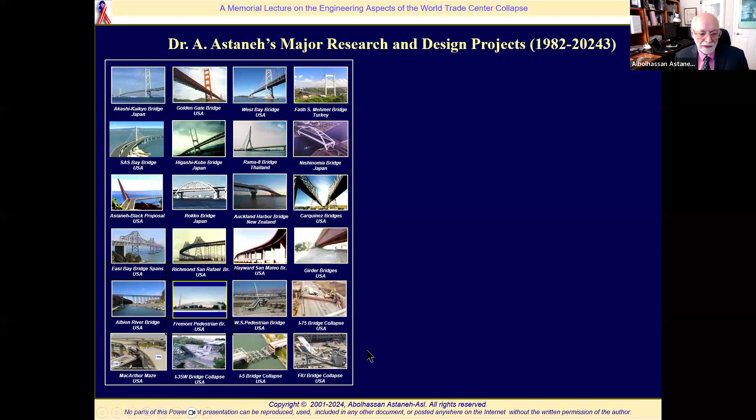I have this slide in all my ethics presentations. I've been involved, as Donald mentioned, in bridges and buildings. These are my bridge projects on the left. Down here is the expert witnessing I've done and failure analysis in court for collapsed bridges. These are the building projects I had, and of course I've been involved in a lot of research at UC Berkeley, at the Earthquake Engineering Research Center, and so forth.

These studies and this webinar are dedicated to the memories of all victims of the 9/11 terrorist attack, and to the firefighters, police officers, and other first responders who so heroically sacrificed their lives to save others.

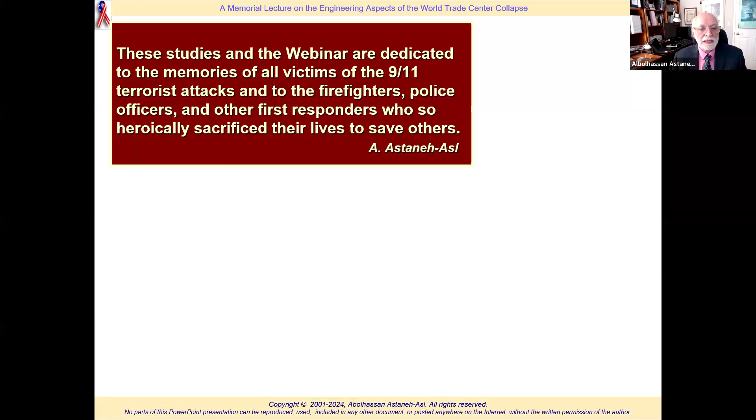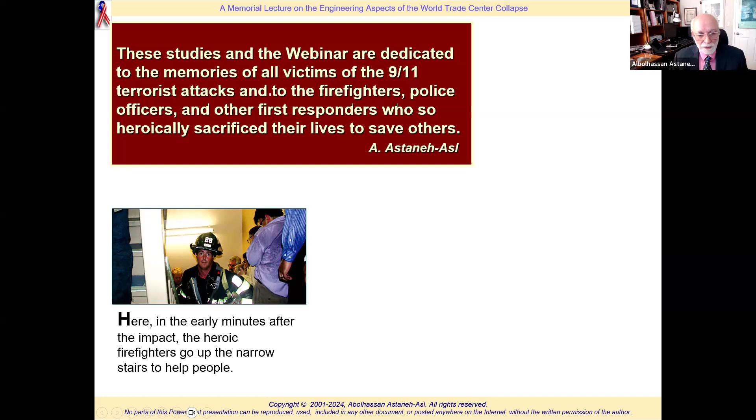Here is the North Tower. You can see people after the airplane hit, and the firefighters going up. They responded very rapidly, and after the South Tower collapsed, they were still in the North Tower helping people evacuate. Unfortunately, with the collapse of both towers, we lost 414 of the most honorable heroes and the best that humanity can offer on that tragic day, when the firefighters themselves also perished in the collapse.

They went into a very vulnerable building - I think this is the highest sacrifice anyone can make. More than 1,500 people who went in, including the firefighters, even a DNA sample was not found.

This is the wall at the World Trade Center memorial at the site now. 2,753 innocent people perished at this site.

In honor of them, and to never forget them, let's have a moment of silence.

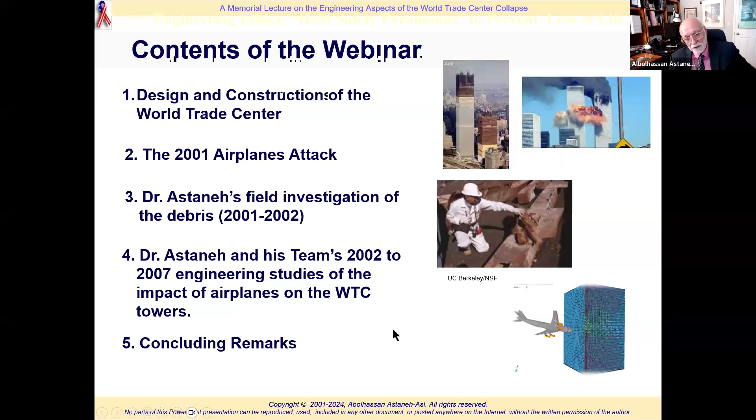The designer, the architect, buildings have architect and structural engineer. Architect usually is well known, kind of like buildings are attached to architect. Architects figure out the appearance of the building, the aesthetic of it, where you should have elevators, where you should have staircases, what the walls should be, the spaces, the bedrooms, the living room, basically the function of the building.

But the structure of the building is what keeps it up. Those columns, vertical columns and horizontal beams, and foundations, are the work of structural engineers. It is always said that if you are a structural engineer, you don't want your name in the newspapers, because when your name is in the newspaper, something really bad happened to your structures. No one appreciates structural engineering. The worst is actually plumbers, they are worse than structural engineers. No one wants to appreciate plumbers' work. It's not glorious perhaps for some people. But they're all professionals. We are all professionals trying to provide public comfort and safety.

So it was so important that it was on the cover of Time magazine at the time. The structure was important, the building was important, and Yamasaki was important.

Then, the structure drawings are signed by Leslie Robertson, who was a graduate of our College of Engineering. But Leslie Robertson at the time was a very young engineer, working for the Skilling firm. Skilling was a structural engineering firm in Seattle, and really the design was the brainchild of John Skilling. He was extremely adventurous, I would say, as a structural engineer, and you will see as I go through this webinar how daring, in a dangerous way, he was.

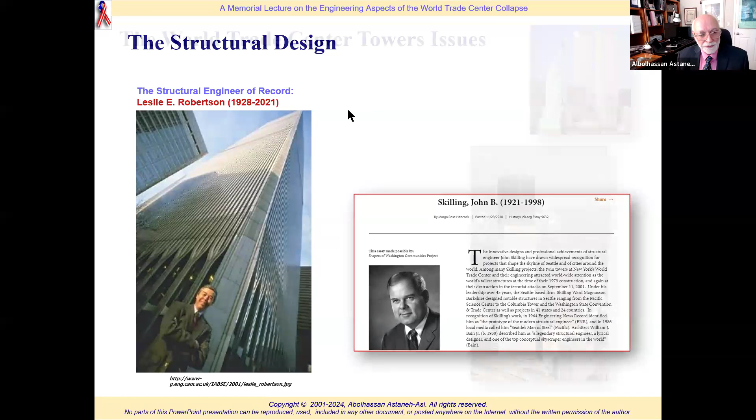So this is the World Trade Center under construction. The World Trade Center towers did not need to obtain a construction permit. You might say, what? Because if you want to remodel your kitchen, you have to go to the city and get a permit. Why? Because you might sell that building tomorrow or rent it, and someone else is going to live in that kitchen. And if it's not according to code, the people, the family, kids, everyone using that kitchen can be in danger. That's why society started this permit process about 100 years ago, starting with a fire in New York. So it's strange that these twin towers did not have a permit.

And they did not need to get a permit. How come? The reason is the Port Authority of New York and New Jersey, which owns the World Trade Center and still owns it, is a quasi-government entity. It was formed between the governments of the state of New Jersey and New York, by an act of Congress, actually. It was exempt from the laws of both states, and also exempt from tax. But it acted like a private developer and was renting the World Trade Center like anyone else, but was not paying tax. It was originally developed for building bridges on rivers in New York, but eventually it ended up starting the World Trade Center.

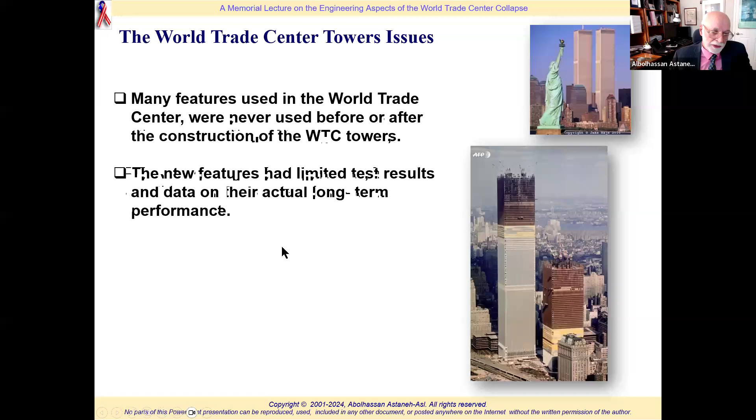The Port Authority, as I said, was the owner in charge of design, testing, construction, inspection, and approval of plans. Now let's look at some of the problems.

The stacked elevators were invented here. In order to increase the area to rent, you can see the core - we call this middle portion the center of the building's core. This is the plan, and it has elevators, restrooms, staircases. I've shown staircases in red and elevators in blue. The red one, we are going to focus on for a few minutes.

The architect, Yamasaki, came up with this notion that until then, elevators were going from the first floor to the roof. Now if it's 110 stories and we want enough elevators to take 20,000 occupants up and down to the roof, it's going to occupy usually 60% of the floor - standard at the time. They didn't like it. They were asked to do something to get more rentable space. I don't want to use the word greed, but the profit motive came in, by corporates, by Port Authority, wanting this building to give more rent money. So he came up with this idea, which you see in many buildings now, which is to stack one third of the building on the other third and the other third.

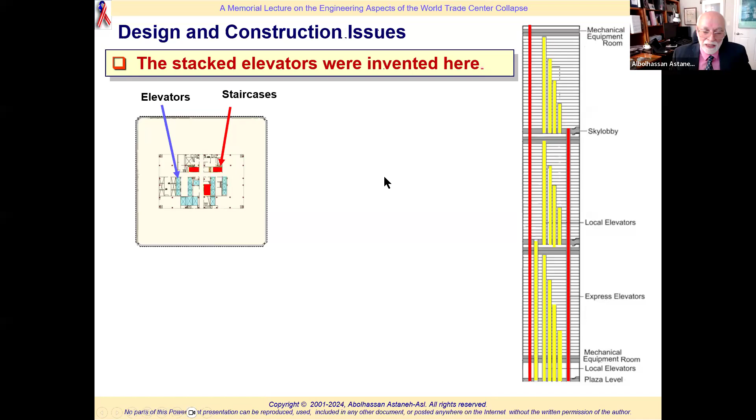This was a very, very important development - it's not a negative development. They ended up having, instead of 60% core and 40% rentable, 40% core and 60% - the donut around it - was rented.

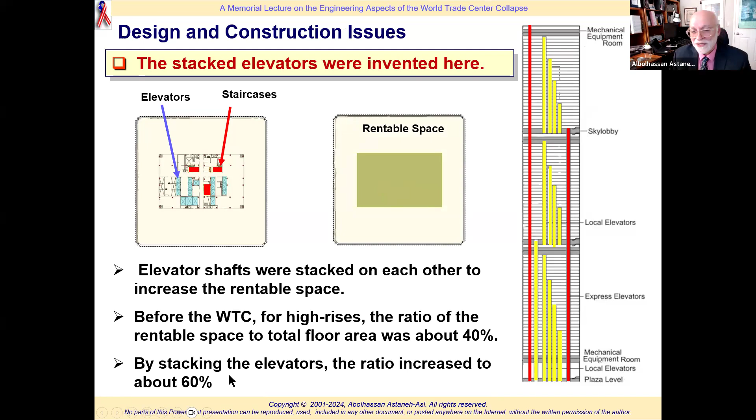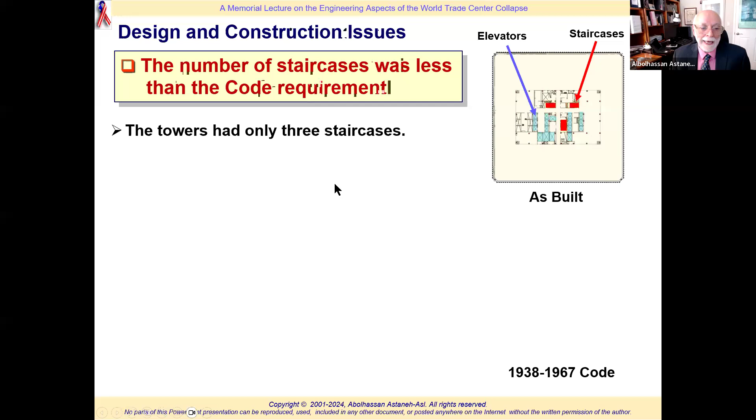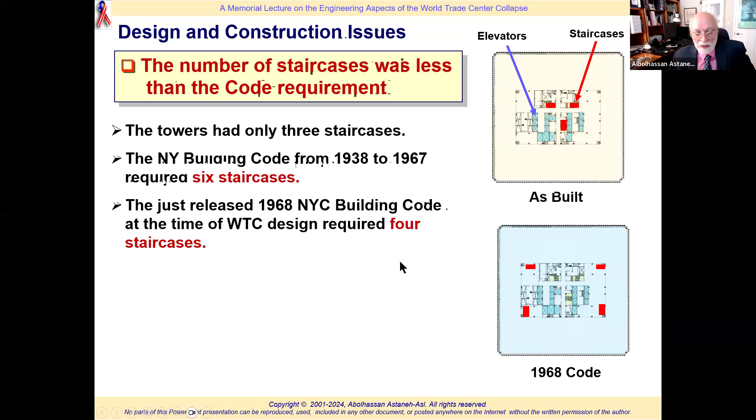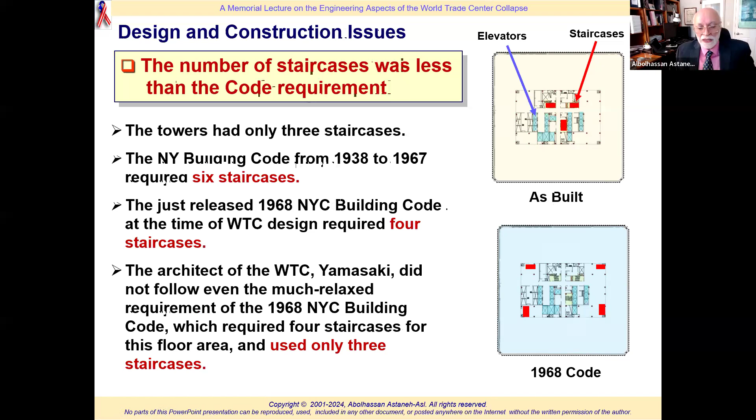The number of staircases was less than code requirement. You can see as-built here, only 3 staircases. This building was being designed in the 1960s, and from 1938 to 1967 the code required 6 staircases, like this picture. I just placed the staircases as I thought would be more rational, for the area - 1 acre area of the building. Then in 1968 it changed, but still required 4 staircases, like this. But they were designing it as they changed the design, and Yamasaki used only 3. This was the first important violation of code - code requires 4, and if you have a 110-story building you might as well do 6, but they went with violation of code and used only 3.

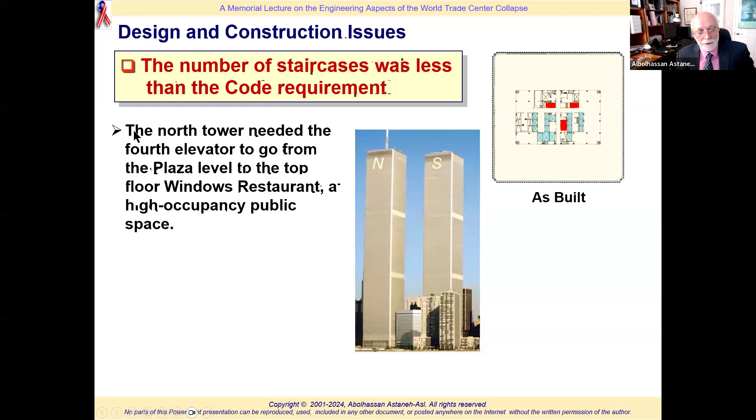So again, the number of staircases was less than the code requirement. The North Tower also needed a 4th elevator, because it had this major Windows on the World restaurant up there - a very large public gathering area. The South Tower also needed a 4th elevator, because it had the observation deck, which continuously had people going from the first floor to the roof, and that should be a separate elevator - it cannot be stopping at stories in between. So all the tourists going up were using these 3 elevators, which is not enough for occupants stopping at all these floors going up.

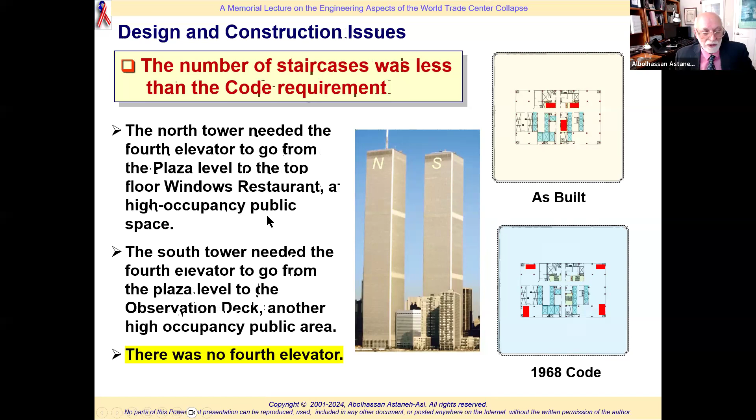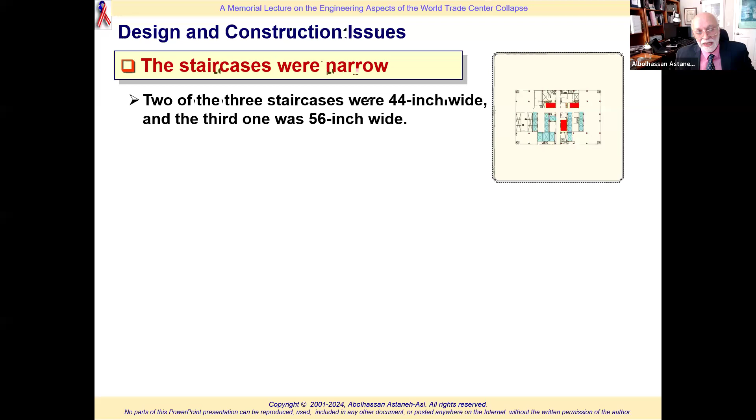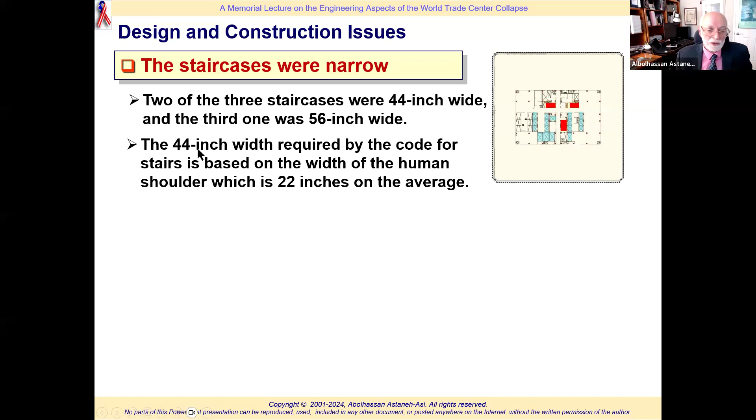The reason you have 44-inch, which was code requirement at the time, is that average shoulder of a person is 22 inches, and they thought one going down, one going up, it will be 44 inches. So they used 44 inches.

But imagine 110 stories, people coming down from up, 20,000 people in an emergency. It's not like nicely going to your meeting and walking at your own pace. 20,000 is the occupancy, and they're coming down at 44 inch. If you open your arms 44 inches, it's not much. It's like two screens next to each other I'm looking at.

So that's what they did, and that's what we saw on the day of that tragic event, how people could not exit. Of course, the people above the impact area could not exit because the staircases were demolished. But the people below the impact area even had a hard time to get out fast.

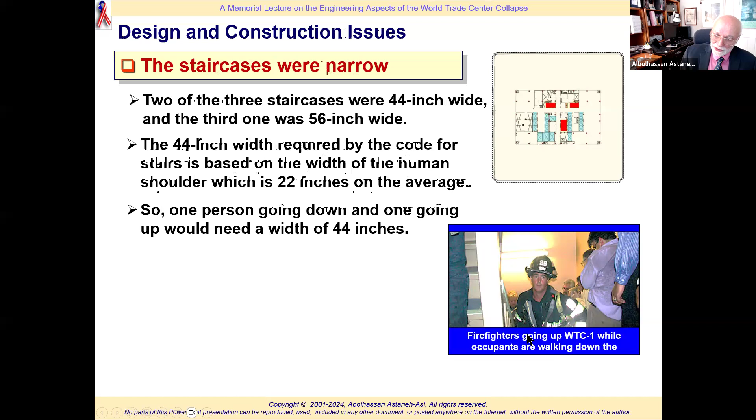So one person going down, as I said, one go up. Now look at this picture, as I showed before. That 44 doesn't fit the firefighters, does it? They have all kinds of gear. By themselves, they might be like 36-inch wide, and they are trying to go up while the other people are going down. So this is another concept.

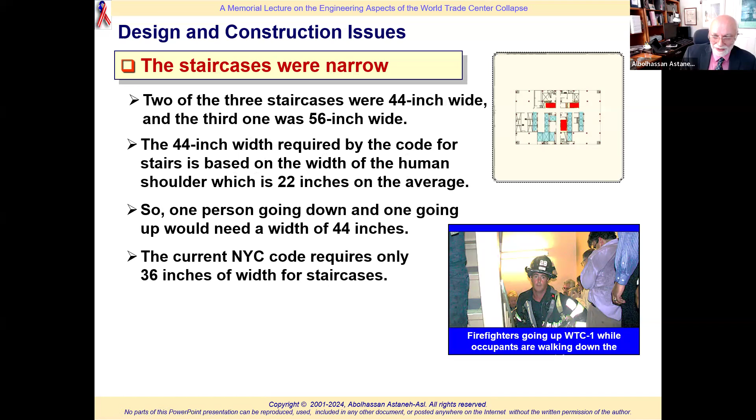The unfortunate thing is this: the current New York City code, I checked yesterday, requires only 36 inches. Have we learned the lesson? Instead of making it like 62 inches, they have made it now 36 inches. I guess the wider staircases, this is my comment, would take away the rentable space, and the developers would not like it. But should the city code consider developers' desire for profit, or safety of the public?

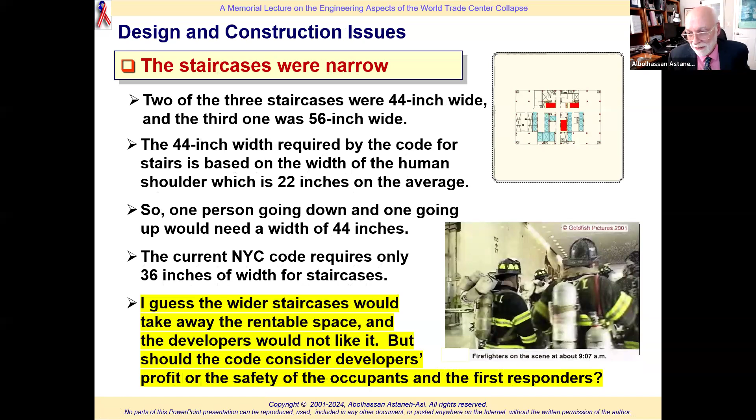And first responders. This is another picture of first responders on 9:07, almost 15 minutes after the first tower was hit, gathering there to go up. With this gear, you can imagine even one person cannot go up with a 44-inch staircase.

Let alone think of the people who had wheelchairs. Of course, when the fire starts, elevators are shut down. So what about them? That's another story, what happened in this tragic event. People were carrying wheelchairs, so difficult.

So all staircases were at the center. Three staircases - I'm not saying code says where you should put it, but it's very well understood in fire engineering that the reason you put these fire exits is so people, wherever they are, can get to one nearby. In this case, you are telling all people around the core that if there's fire, go inside the core and go down from one of these stairs.

What happens is actually the most danger for fire is in the core. You have all the pipes there, you have all the electricity there, you have all the other storage there. The fire does not start here, it starts mostly here, and you're telling them to go there and go down. You'll see what was the consequence of having those 3 stairs at the center.

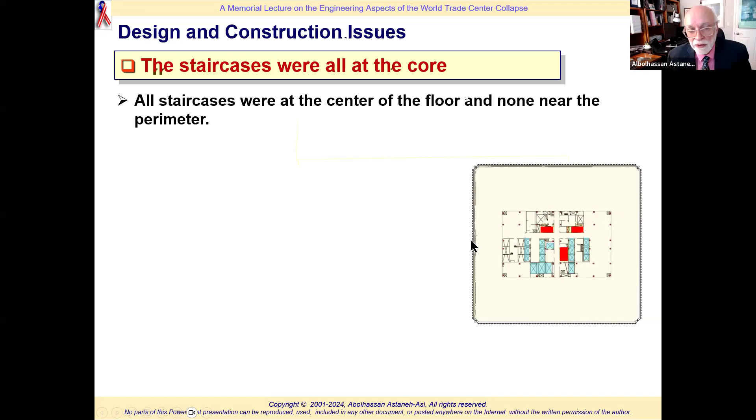So one of the documents included in the NIST report - because later National Institute of Standards and Technology got a grant to study World Trade Center properly - they reported that they got a document from Port Authority that showed Port Authority was eager to cut down on the amount of space devoted to stairs. How tragic that can be - that they're thinking, can we cut 2 inches from the stairs so we can rent that 2 inches?

One acre is the floor. In the impact area of the North Tower, I'm usually showing the North Tower plan - the other one was very similar. The staircases were 70 feet apart and were destroyed immediately when the plane hit.

I'll show you, when the plane came from the north, it destroyed all 3 staircases, and more than 1,500 people were trapped, and they, of course, perished in the fire or the collapse.

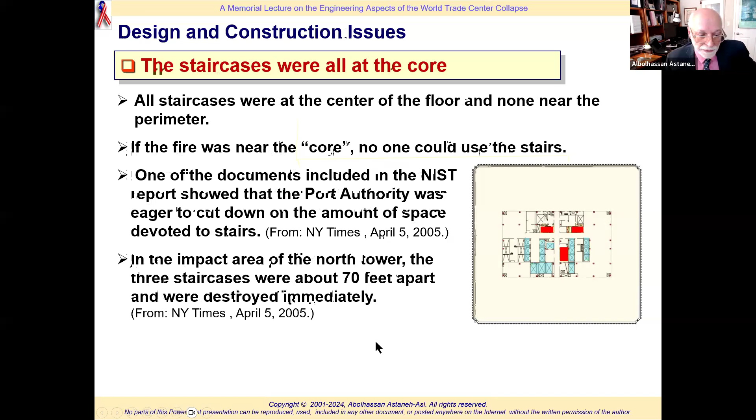In the South Tower, the plane hit on floors where the 3 stairs were about 200 feet apart - they were a little bit farther apart. And I met one person who had escaped from that damaged floor. He was a young person and had retired from work, and I met him in LA when I was doing a presentation.

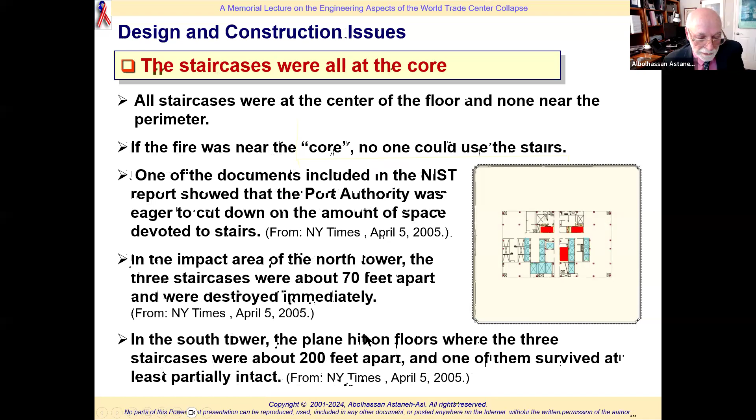I'm not clear, I couldn't find if the partitions were fireproof. They required curtains to be fireproof and furniture, but I don't know if partitions were fire rated. That's why the whole floor was like a burning charcoal pit. So it was without firewalls.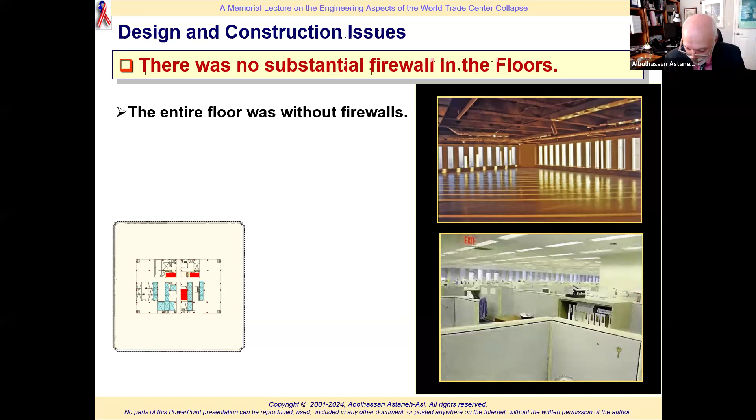This is very important. There are certain code requirements, fire code, that you have to compartmentalize your floor, especially these large floors. So if fire happens in one corner, the other parts of the building don't get affected, even the smoke doesn't go there. They're all fire doors. But in this case, of course, there were no fire walls.

At least, if they were planning to keep the configuration, they could divide it into 4 and have each one have its own staircase, so everyone can have their own staircase and their own space. So if one gets on fire, the other 3 are able to escape.

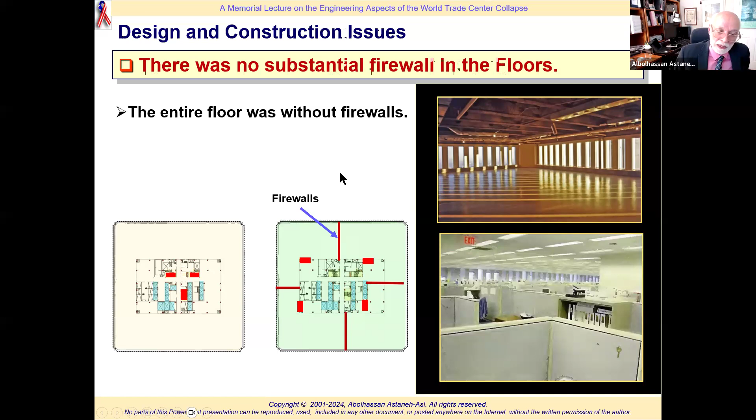Staircase walls were drywall. This is unbelievable. If you look at your building, an office building, even 4 or 5 stories, it is either concrete blocks, or for tall buildings, just reinforced concrete wall. This is the only building I got to know where it was drywall, just gypsum board. You can see the staircase.

So what is the impact of it? When the plane hit the building, the staircase, of course, was nothing, like cardboard. And the plane went in and hit the large columns and exploded and spread the jet fuel gas, and started the fire. This is not allowed in any code, anywhere in the world.

I can't imagine any even half-civilized country or city would allow gypsum boards to protect people in staircases that are fire exits. In fact, the staircases should be pressurized to always keep the smoke out. The doors of staircases should all have very strong steel spring hinges. This was not the case, they could do whatever they wanted, and they did, to save money.

In fact, in 1993, there was an attack with a car bomb, there was smoke in the elevators, and one elevator had 4 people trapped in it at mid-height. These 4 people, using the keys for the car, were able to poke into the wall and say, oh, this is gypsum. So they kicked it and they came out.

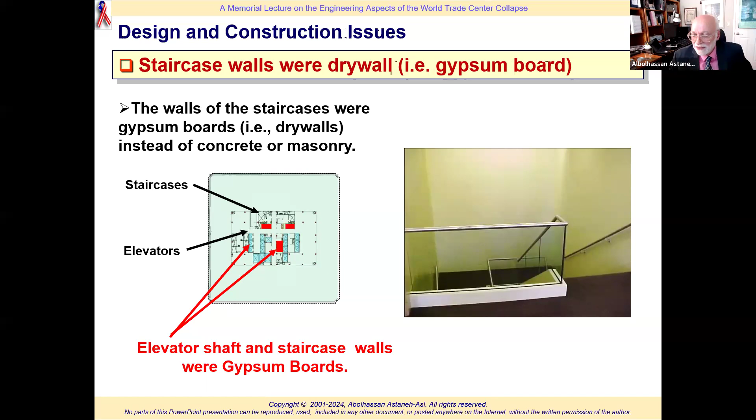This story was in the New York Times, and it was very exciting because everyone said, oh wonderful, they saved themselves from smoke because the elevator shaft becomes a smokestack. But no one, including the Port Authority of New York and New Jersey, or even the engineering community, asked: what, someone could kick the elevator and staircase wall and come out? What was that wall, concrete? And then, of course, they had to correct it, but nothing happened.

Staircases were not going straight down. This is an amazing thing. In order to have these big, probably conference rooms or meeting rooms, look what happens if you're coming down from the top. You come down and get out on this floor. What is this floor? This floor is some corporate floor.

So you're coming down, you go straight down, and after 10 or 12 stories, you have to find your way to this exit, come down a couple of stories, go back, come down, turn around, go here, come down, find this, come down, go back. Imagine, fire is behind you, smoke is killing you, and you're trying to find your way, and probably electricity is even gone, and you're in these floors you've never been to, trying to find this path. It is worse than a trap, it's like designed to make sure you get lost and don't find your way out.

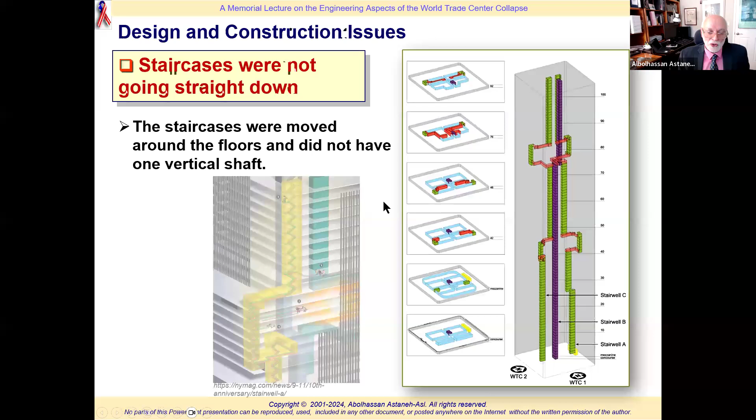So these are the movements of the staircase in the floor, and this one shows it very close. Imagine you're coming down, you have to go there, come down, come back, go up, go to the right, turn left, turn right.

Imagine in the panic, especially if you have health issues, many of us have breathing issues, you are not athletic, all of us are not like 20-year-old Olympic athletes. You are not going to be able to go down easily. This exit should be designed for people, not even average people, but people who need help. A fire exit means for people who are at perhaps 20%, 30% of their health power, not Olympic athletes. So this is tragic.

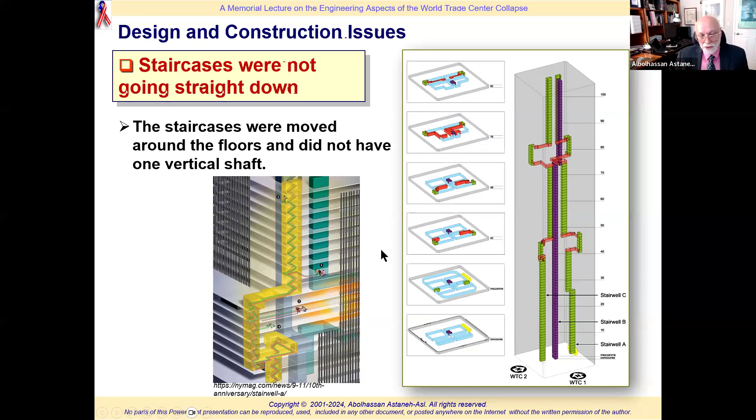The bottom 10 floors, now we look at structure. That was the cause of collapse. The bottom 10 floors have a typical concentrically braced frame system.

Those of you who are not familiar with structural engineering, in structural engineering we have a framing system, columns and beams. Any building you look at, other than World Trade Center, has vertical columns, horizontal beams, like this 10-story of World Trade Center in front of you.

On top of this 10-story, they put this box. This is what caused the collapse. So this is now going up: 7-story basement, 3-story plaza, first floor, and so forth. Now they are putting this 100-story up. This was the strangest, worst structural system you can put against fire, and that's what happened. It did exactly what is expected to do and collapsed. Couldn't take that fire.

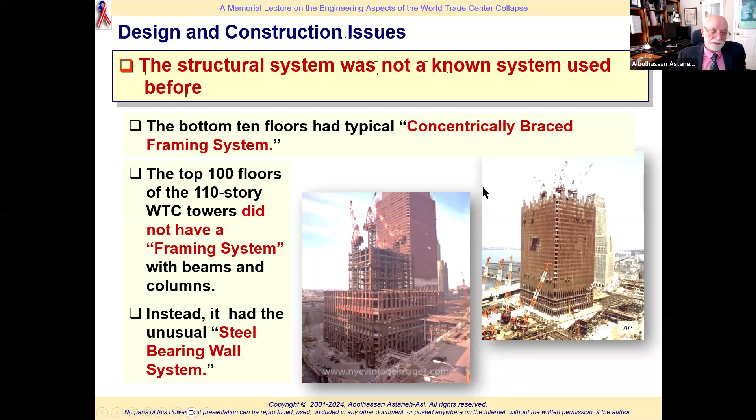The 2001 airplane attack hit the top floors with the steel bearing wall system. So this 100 floors, in fact you could tell from the look of it, right? World Trade Center towers, the top 100 floors didn't look like any building. Architects didn't like it, they said it's like a shoebox. And no one said, why is it like that? Why is it like a box? There is no window, there are no column lines coming down. That is because it was not a framing system. It didn't have columns, didn't have beams. It was a box of steel.

It's like a box of steel, but it was huge. Steel plate.

So in both attacks - I said 1995, it should be 1993, the car bomb attack, and the 2001 airplane attack - the terrorists, in my view, may have been trying to collapse the North Tower onto the South Tower, because the one in front is the North Tower. The first plane came and hit the North Tower coming from Boston, right straight at the center, trying to topple it onto the South Tower, which if they were successful, would topple onto Wall Street, reach Wall Street.

But it didn't happen because the tower box was so weak that the plane went in and disappeared.

So I was surprised when I saw it, that I didn't know the structure, because no one knew what the structure is. No one had any information about the World Trade Center structure. I saw that the vulnerable plane, the tail even, which is very thin aluminum, went in. How come? The nose I understand, but the tail is very vulnerable for cutting through steel beams and columns. The reason was, of course, there was no beam and column.

So what is the steel bearing wall? Buildings until the 1880s were masonry, and the way they built it, the walls around the building were masonry or stone. Sometimes it would go up - of course it has windows, but small windows. It would go up, and there were some cast iron columns in the middle, and they would use wood trusses from the middle cast iron columns, the blue ones, to the walls outside. And then they put plywood planks and wood planks, and then some gypsum or other concrete or anything on top of the wood planks, and you got your building.

This was called bearing wall. But of course, you cannot build a 110-story building with a bearing wall. In fact, I calculated that if they had used a bearing wall, the thickness of the wall would be so much the first floor would be just walls. So gradually, as you go up, you could have some space inside the walls to have rooms. But in any event, there is a system.

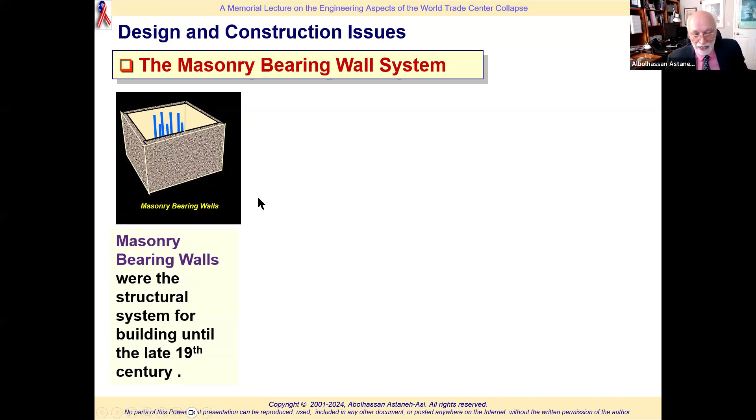This bearing wall system ended in the 19th century. I'll show you who ended it and came up with this framing system that we use in millions of buildings.

This is the tallest masonry building that is still alive and well, in Chicago - the 16-story Monadnock Building, which was built in 1891. It took 5 years, so it finished in 1896, and thank God it's still proudly standing up. But if you look at the base, the walls are getting thicker and thicker at the base. In any event, this is the floor plan. The first floor has very, very thick walls, as you can see, with very small windows.

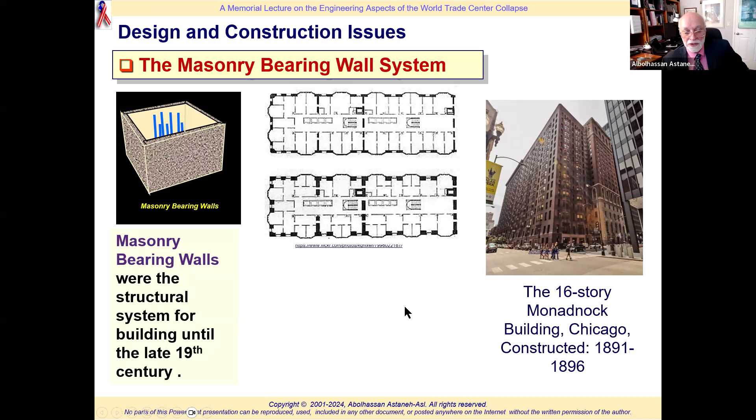You can see the window. As you go up, the walls get a little thinner, but still, this is all masonry walls around, and the little columns inside. So this is the tallest brick bearing wall that we have.

What they did was, in the case of World Trade Center, they said let's use bearing wall, that will be cheaper, but of course we can't use brick or stone, let's use steel plates. Imagine like the steel pit that we put gasoline in it or whatever. So that's what they did.

But let me show you this one, because William Le Baron Jenney was the genius engineer who said that we don't need these thick walls and small windows. What we're going to do is have these columns. You see here, the steel columns, steel beams, and open up the walls. We don't need the walls. The walls should be just for protection from cold, warm, theft, and those things.

The structures, the floors, should sit on these columns. The weight goes down to the foundation. So that is the first building, the home insurance building. Unfortunately, it was demolished - I wish they had kept it. It was demolished years ago, I think 1931.

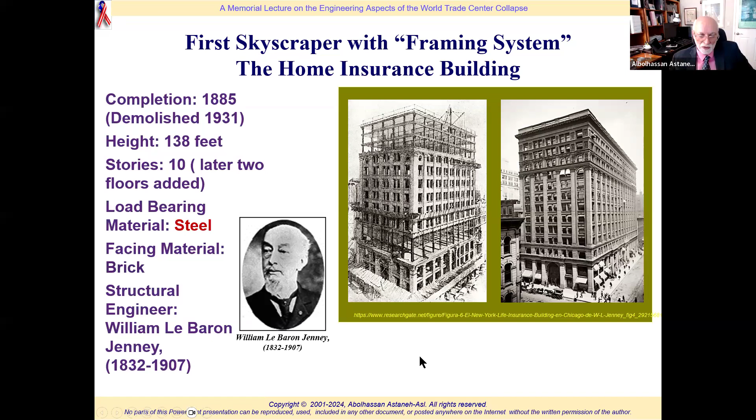So now almost all buildings, even your home, have vertical wood studs and horizontal studs, joists, to get the load to columns. There are columns, and then you put gypsum boards as wall and so forth. So what they did with the steel...

So this is the masonry bearing wall - you know, this is the Monadnock building. And what they came up with, this is the steel bearing wall with columns inside, right? They are building it here. This is a steel bearing wall.

They invented it, and I wish they were not, because we would have many of the residents alive today. And of course, the tragedy will cause a lot of casualties in the plane and so forth. But still, it will not be just the building completely evaporating and collapsing on occupants.

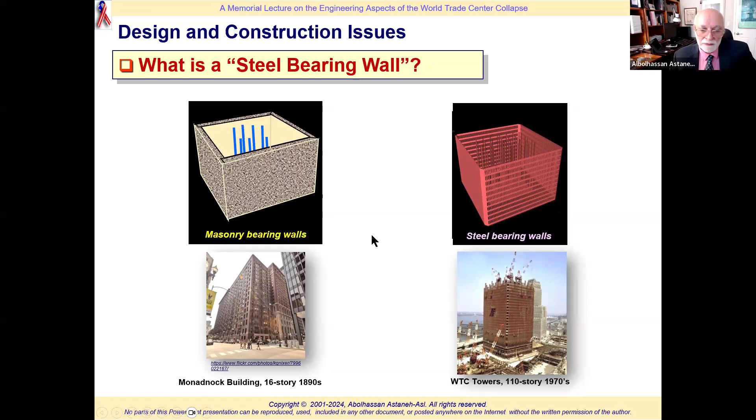This is the wall, and this is the exterior wall. These are pieces of wall fabricated in Japan, 3-story, came to the site. They were bolted together. It was like a Lego, exactly like a Lego, and collapsed like a Lego. They fell apart. And the floors - it's very interesting.

The floors were steel trusses. These trusses are used in places like Costco's of the world, Safeways. They are for long spans, but low rises, because they are very, very vulnerable in fire. They have very large area compared to their weight. So fire completely easily gets them to high temperature and they collapse.

The bearing wall collapsed like a house of cards. It was the house of cards. These little bolts would work if the steel was cold and could carry the gravity. But if the steel got hot and could not carry the gravity, they buckled in the fire floors and the whole top fell on the bottom.

So let's continue. I miss showing graphs in classes, so I put this graph - I apologize. This is showing the change of strength for the materials we use. The red is for steel. The dark blue is for normal weight concrete, and the light blue is for lightweight concrete. This building had lightweight concrete.

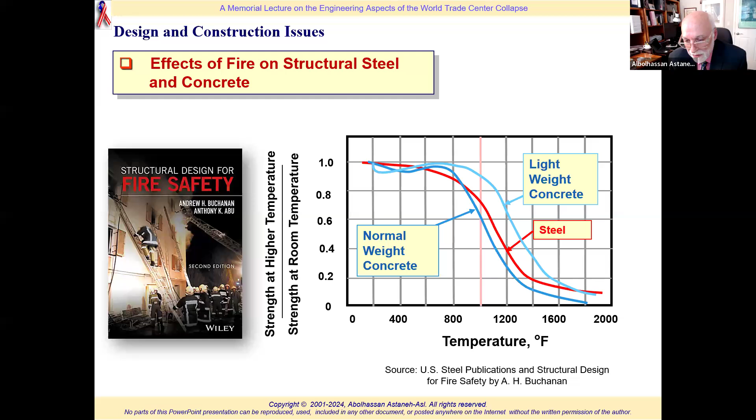So all of them, concrete and steel, drop their strength from 1 to almost half when we get to 1,000 degrees Fahrenheit. If you want to remember a number, it's just 1,000 degrees - the strength has dropped. So you have this weight, and you calculate this strength. But if the strength is reducing, at one point the load becomes equal to strength, and after that it's going to collapse. The strength is reducing, but the weight is the same - gravity is not changing, but your strength is changing.

Very simple thing. So these are some of the pictures I took, those Lego pieces. The reason you see it's not just a plate, because this is the plate that's carrying the load, but the plate buckles easily, so they have put these boxes behind it.

It's strange enough - look at this cross-section of the box. Fireproofing was outside the box. The left is inside - you didn't have fireproofing. Why do you put fireproofing at the elevation of the 110th story outside the steel?

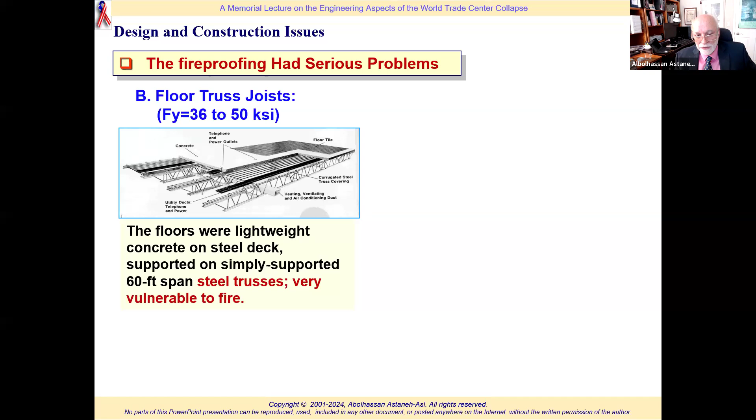This is the floor. They built this floor and brought it to New Jersey. Overnight, they shipped it to New York, and in the day, they put it up. Everything is included, but the joist is very, very vulnerable. The walls are vulnerable, the joist is vulnerable. There is no column, not on the perimeter. So there is no luck here, no one can help you.

It was doomed. This is the floor truss. This is the bar that, if it fails, the whole floor drops. This single bar is holding the 60-foot long truss, 60 feet. And look at the fireproofing of this bar.

Do you see fireproofing? There was a famous saying in New York that if you are an inspector of the high-rises in Manhattan, you better know how to swim well. The joke was that if you go up there inspecting and suddenly you find something like this, no fireproofing in this critical member, you will be pushed out from the window, and you better know how to swim in the Hudson River.

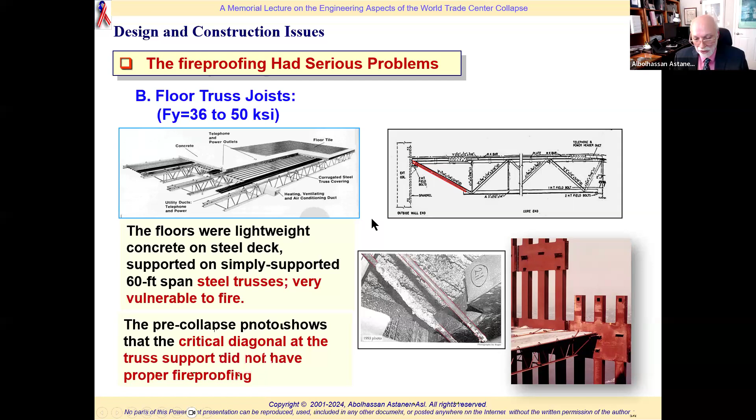But in any event, the pre-collapse photo shows clearly that this bar didn't have fireproofing. Even if it had fireproofing, in those floors that had fires, the fireproofing would drop anyway because of the impact, and there was no sprinkler system working. The plane hit the sprinkler system in the middle.

So this, as you can see, the Legos are going up, I call them, and the floors are being put on those little pieces. This is not a frame, this is just building a house of cards. If gravity is there, if strength is there, we are fine. If gravity increases, you put more load, or strength is reduced, it is doomed.

These are some pictures of fireproofing. There was not much, and whatever was there was gone.

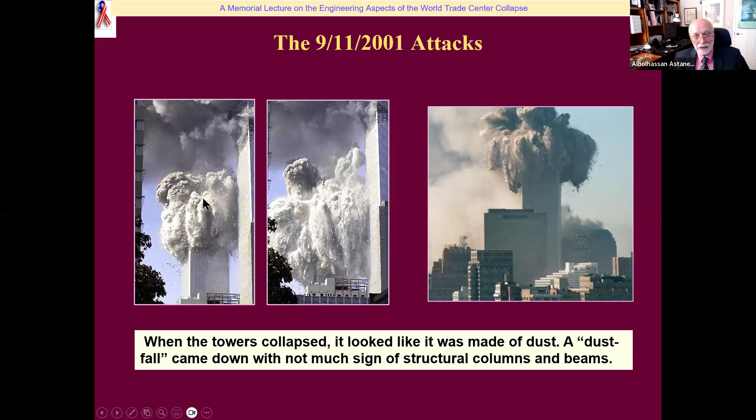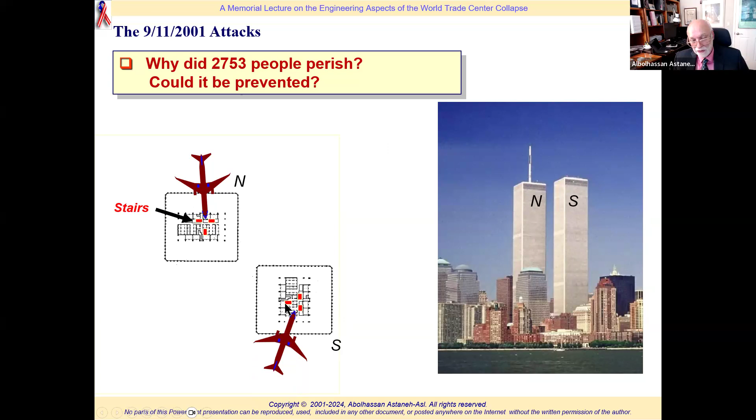So let's look at the collapse. Why did it collapse like this? This is the plane coming from the north, hitting the north tower. The 3 staircases were gone. The plane from the north also came and saw that the tower was on fire but not collapsed, so it turned around, went south, and hit this one from the south. But it hit at an angle, so these 2 staircases were damaged, one was damaged but still passable.

So this is what happened. The plane comes in, gets in through the curtain wall outside. This is really a curtain wall, we call it, a very thin wall. It gets in, hits these large columns in the middle, and breaks some columns, but also the whole plane is disintegrated, and the jet fuel starts a fire, and the floor joists are collapsing.

And when they collapse, these walls don't have support, they buckle. When they buckle, the whole 26 floors or 34 floors, like a big weight, drops on the lower part and, like a hammer, hits down. Because there is no column, no beam, you don't see anything other than floor concrete and gypsum board being disintegrated and dropped. So this is what you see. Sometimes you see some wall pieces, but this is really the gypsum board of the walls and the lightweight concrete of the floor.

These are pictures that my photographer took. I hired a local photographer in New York, and these are some of the pictures. We took thousands of pictures, and I came back and analyzed them.

So here I am investigating this. First, I went to the site. I was outside the site doing the investigation. I was able to enter, paid my respects and prayers, and it wasn't the place to stay and investigate. It was a horrible situation, still on fire for 2 weeks.

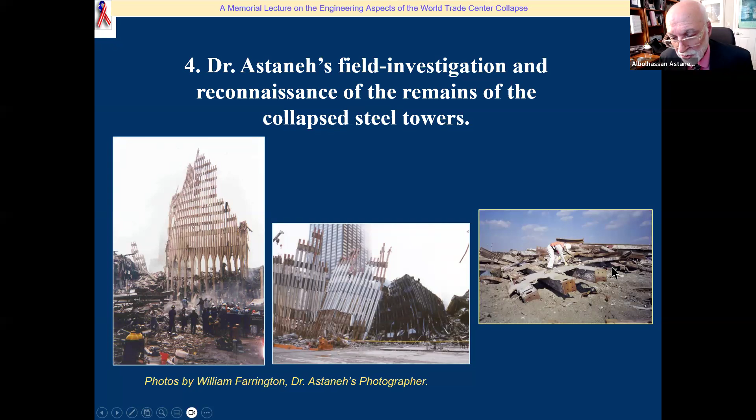But I was going to New Jersey because they were taking this steel to New Jersey, washing it and getting DNA and other personal stuff out of it, and storing it there. So I was inspecting there, basically, as you can see.

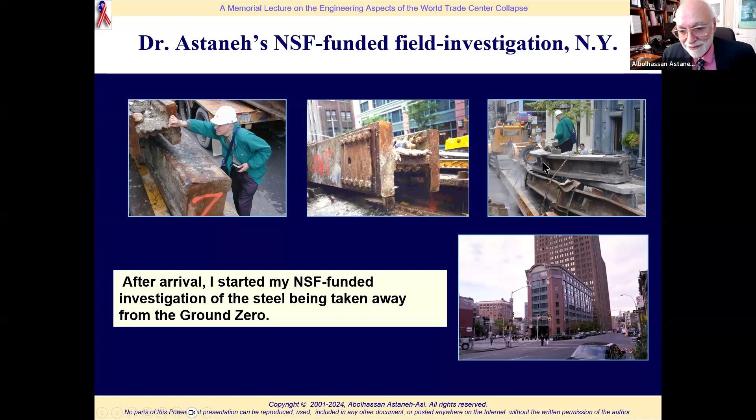This is the first time I arrived, and I was in this Tribeca hotel. They were bringing these, putting them out. Other trucks would come and take them because the trucks coming from inside, they didn't want to send those trucks to New York. So there was a transition. I was in front of this hotel, and they didn't even have my key, so I asked, and they sent me the keys from Berkeley, and I did.

So these are some of the steel that I was dealing with. There were 200,000 tons of steel, and I think I did inspection of 40,000 tons. But rapidly, they were chopping it and sending it to Mexico and China for melting. This was the Port Authority's decision to make sure no evidence was left of these structures to show what they were.

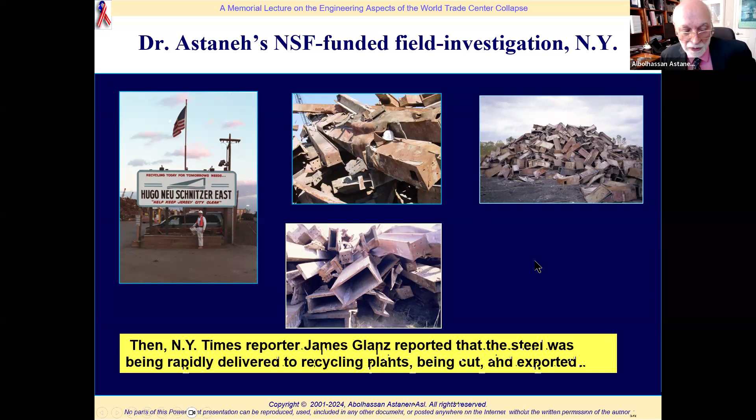Monica Gabrielle's husband perished in the floors above the fire while they were talking on the cell phone. The building collapsed while they were actually talking on the phone. As I said, this is tragic, and we have to be respectful, but at the same time, the facts should be said.

Now, it comes to this. Not only did the engineers who designed the World Trade Center, in my view, follow the orders of the client to make the building as cheap as possible, as low-cost as possible, at the expense of safety, but then came the investigation of the collapse.

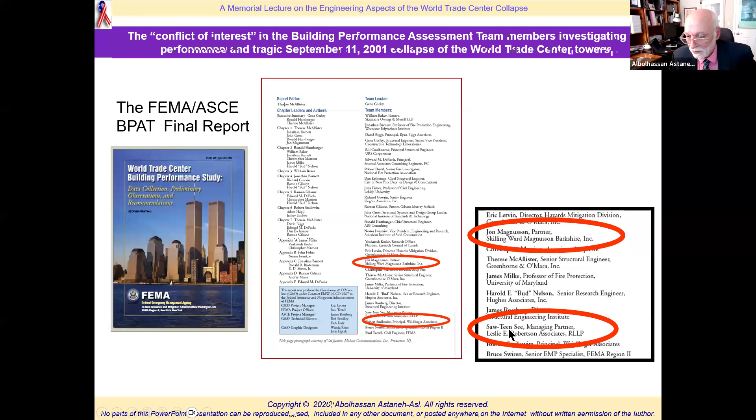In my opinion, the FEMA ASCE BPAT signing of the non-disclosure... the most important thing was that ASCE actually signed a non-disclosure agreement with Port Authority to get the drawings, agreeing they will not say anything that would give Port Authority legal exposure. In other words, they're not going to say anything bad in this report.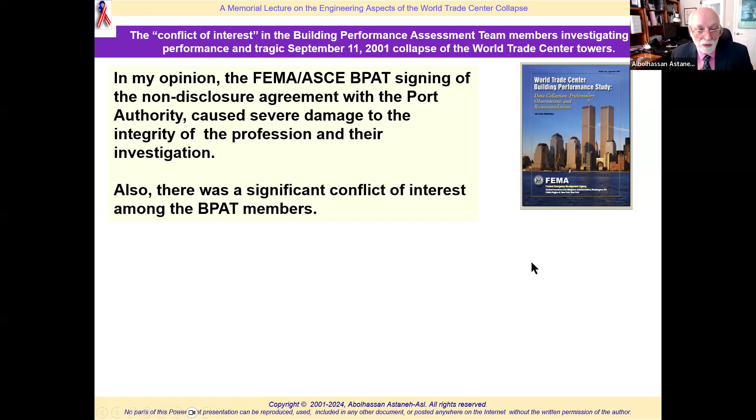Can you believe it? This is happening in America, that ASCE, getting funding from FEMA, probably FEMA doesn't even know about this, gets the money - I think it was 1.5 million. They go to Port Authority to get the drawings, and Port Authority says, we can't give you the drawings, you have to sign a non-disclosure. So it was very serious conflict of interest, and very serious giving away your freedom to tell the truth.

Then came the outrage of victims. So Sally and Monica went to Congress and complained, and that's when George W. Bush set up this whole process of allocating $8 billion to victims' families. But this group of families, 50 of them, which I had the honor of being on their advisory team, did not want that money. They said we don't want to accept the money, and they did not sue anyone. They said, we're going to dedicate ourselves to making sure this doesn't happen again.

So they went to Congress, and Congress held hearings. I was invited to the hearing - here I am, I didn't have a beard, I wasn't as distinguished as I am now. In any event, there was the fire engineer, the FEMA associate director in charge of this case, the NIST director, and so forth. This was the Committee on Science.

For four hours we testified, and Chairman Boehlert was the chair of this committee. I was the only one who actually had information - the rest were not there to give information about the site and collapse. After that testimony, Chairman Boehlert turned to me and said, Professor Astaneh, what do you need to continue? And immediately I said, I need the drawings.

The drawings were under the... of course I had looked at the drawings, because Leslie Robertson - at that time we were friends - invited me to his office and told me the drawings were on the second floor of his office. All the drawings were ready for FEMA use, and I could use them, but I should not make Xerox copies. So what I did was take tracing paper and trace information every time I was there. I usually was there from 6 to 8, and then I'd go to New Jersey to do the day's field investigation.

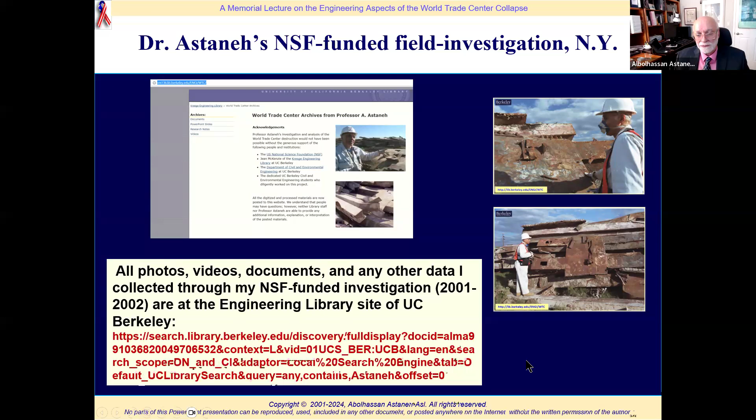So all the information I gathered is here. The College of Engineering Kresge library has all the information. I checked it last night and got this URL, just copied it and put it here. If you click all the photos, I think there were about 8,000, all the reports, all the documents I gathered, the data is there.

The last part is really the study we did from 2002 to 2007, 5 years. It was not funded. I always say it was honorary funding with the Skyscraper Safety Campaign. I did this based on a promise I made to Sally when I was in New York. We always met with these victims' families, this group, with an architect and fire engineer and others, 10 of us advising them. I told her I have the drawings, I'm going to investigate and see what's happening. Chairman Boehlert actually told me I was free to use it. So I did, and here are the results.

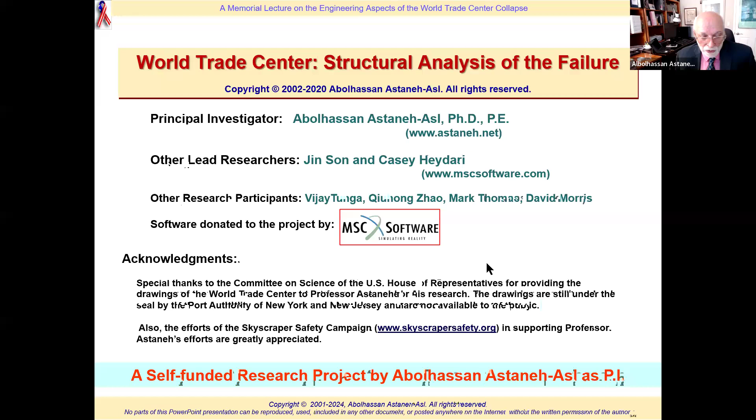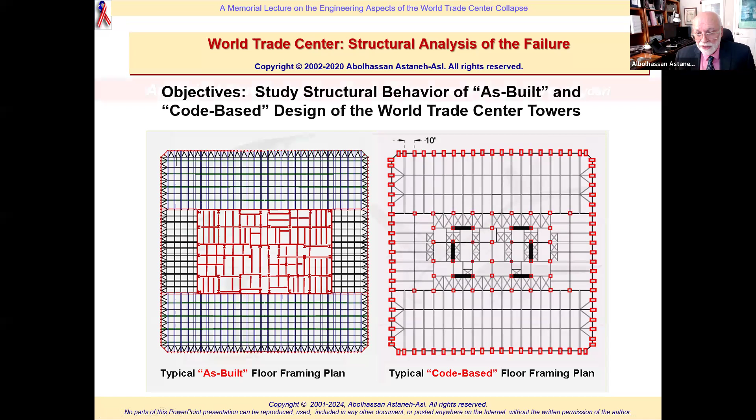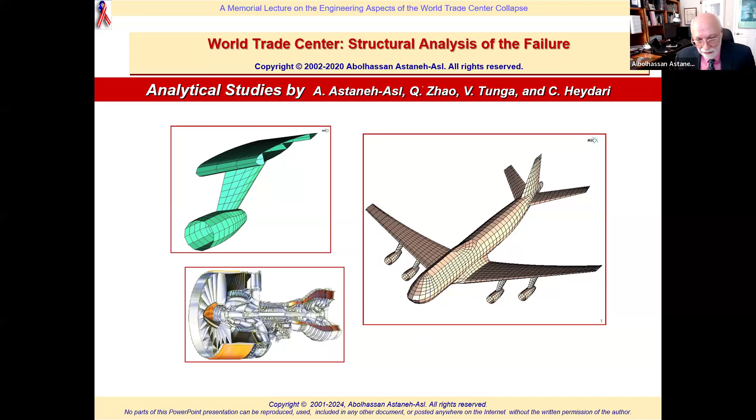So then we'd build a model of them and bring in an airplane model and hit the building to see what happens. Fortunately we had a very detailed model of the 747 Pan American plane that exploded over Lockerbie, the tragic event. We built the 30-story section where the plane hit. On the left is the plane hitting the existing, as-built structure. See what happens, it goes in completely, as you saw. We had the angle, pitch, and so forth right. It's very detailed. This software we used, three programs, each one costing $100,000.

But it was donated. I had a classmate from Michigan who saw me on TV and offered that his company, MSC Software, would give us whatever we needed. This is the highest, most sophisticated software, used in car crashes now in Detroit. So we used that software, and he sent Tunga, Vijay Tunga, his engineer, to help us use it. And this is my friend Heydari, Casey Heydari, who made this donation possible.

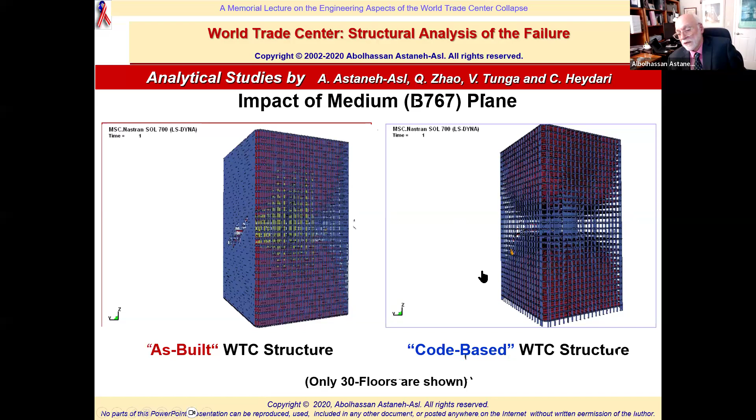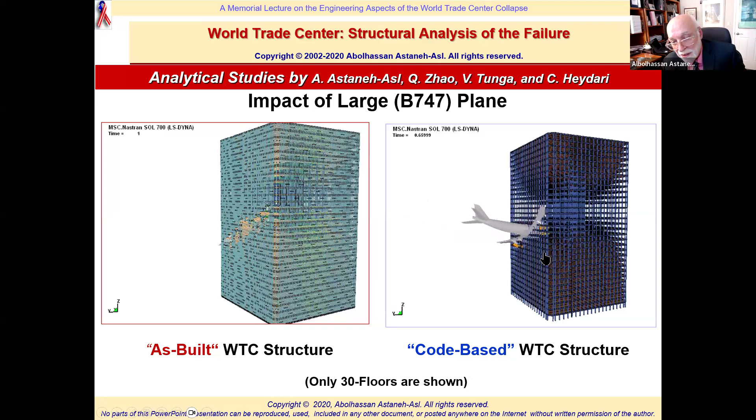The nose is very tough. So we actually modeled the 747 with the exact specifications. If it had hijacked a 747 and hit the as-built building, it would just collapse immediately because it cuts the whole width of the building, 220 feet, which is the wingspan, and the building cannot stand. But on the right, with the typical code design, some engines go in but the wall still contains the engine. The important thing is that it's shredded outside, so the jet fuel drops outside the building.

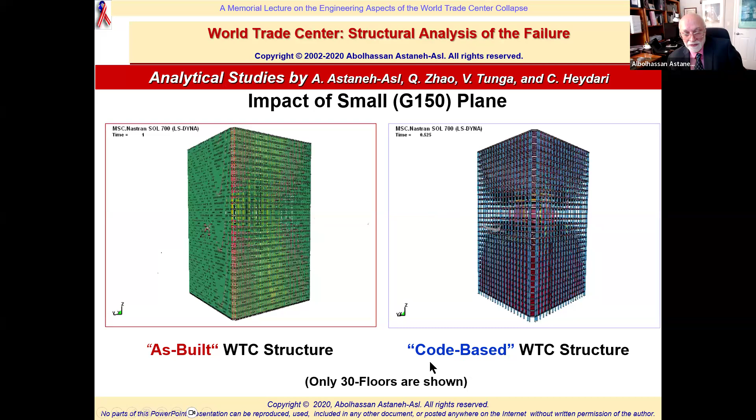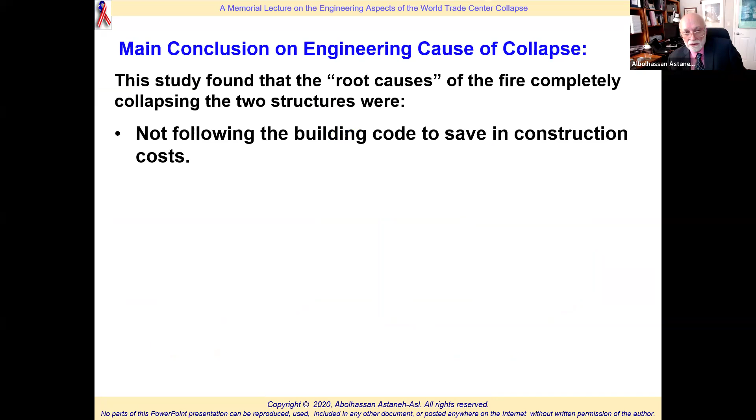So with that, my main conclusion is that this study found that the root causes of the fire completely collapsing the two structures were not following the building code to save in construction cost. If they had followed the code, they would save people, but they didn't follow the code to save in cost. Using the unknown steel bearing wall system, which is very vulnerable to fire, but costs much less than well-established structural systems in the design codes. Not providing sufficient fire protection system for the structure, again, to save in cost. Not providing necessary and protected exits for the occupants in case of fire, that would reduce the rentable space and rent income.

With that, I thank you for your time. I'm sorry I went way beyond, I think that, but I will be happy to answer questions.

Donald? All right, thank you very much, Hassan. That's a very thorough and convincing analysis of what happened.

So let's see what we have in the questions to ask you.

There have been questions about adequacy of fireproofing of structural steel, and if so, lack of which could cause collapse. Has there been research on this issue or factor as lessons have been learned for similar structures?

Well, one lesson that was learned was that until even now, we are still doing that. Fireproofing of structures is done by architects. I think that's completely wrong. Architects don't know fire engineering, it should be done by fire engineers. And the only thing architects do, even for 110 stories, is they specify hours that fire can go on without structure collapsing. So you see the problem: architects don't know structure, but they are deciding how many hours we should put protection. In this case, the protection was 3 hours for the walls and 2 hours for the other elements, but it didn't actually matter because the building was so vulnerable.

This is very interesting. What happened was this building was so flimsy - the only word I found is flimsy - because it didn't have columns and beams to have stiffness, so it would vibrate if it was built, and people would get seasick. When high rises don't have enough stiffness, the wind comes, causes resonance, and starts moving the building. That movement usually makes people who sit a lot, like professionals, or these days all of us behind computers, feel seasick.

So in order to check this, they decided they needed to find the frequency - if a building has that frequency, it can get resonance with the wind. That frequency is actually used now in the design of all tall buildings. So what happened was they could not test this building and announce to newspapers that we are testing to avoid vibration - people would ask, why should a building vibrate?

So they went to Oregon. They rented a 2-story building. They set up on the 2nd floor a whole eye examination shop, and announced that they were giving free eyeglasses and examinations. The 1st floor was actually a laboratory measuring the frequency. So they had the chair of this eye doctor set up as a vibrator, like a testing lab.

So you go there to check your eyes. These days you cannot do this - you have to tell the patient what you're doing with them. So they used them as unwitting subjects.

Anyway, in the interest of time - the guy sits there, they are examining his eyes, and suddenly they start vibrating the chair with increasing frequency. At one point this person, the doctor, says I feel dizzy, I feel something. And they said, no, I think there was maybe a minor earthquake, because Oregon gets earthquakes. And then they got the data.